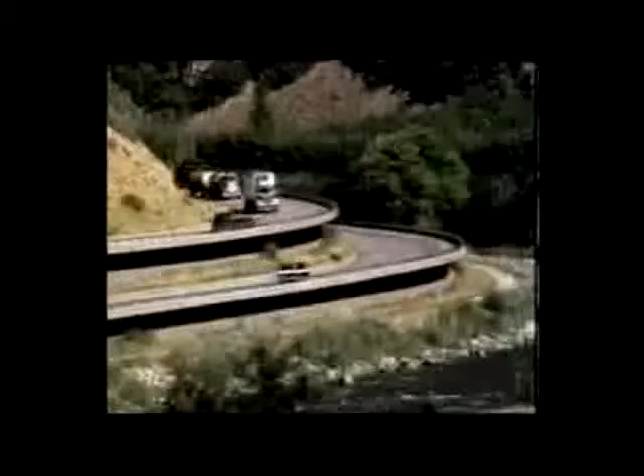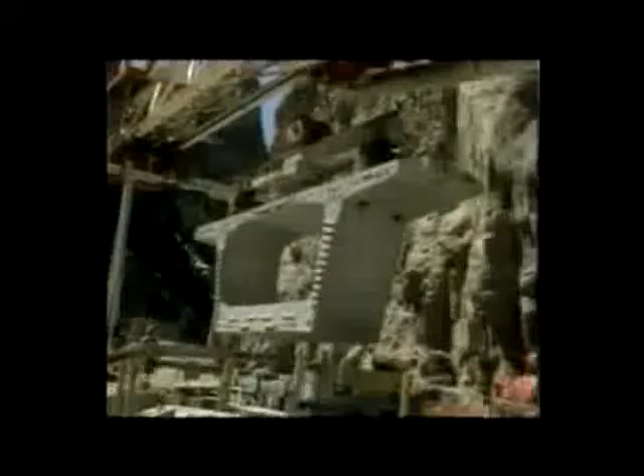Some of these technologies were developed on the Glenwood Canyon I-70 project, which I managed for 12 years. Under my leadership, we aggressively developed and implemented innovative solutions in many areas. Traditional methods and materials would not have allowed us to construct this award-winning project. Technology does not stand alone. It requires professionals for implementation, problem solving, and continual improvements. We call these specialists subject matter experts. Adoption of new technologies requires support from an enlightened management.

We will show you in this video how your agency can both save money and provide better service through internally supported MSE technologies. First, let's look at why agencies are not already implementing these MSE technologies. There must be reasons why we're leaving hundreds of millions of dollars on the table each year. There are reasons, and these include the human tendency to resist change, to preserve existing paradigms.

Technologies, however, are never static. From the beginning of history, man has pushed the limits of his ability. In transportation, we began on foot. And then we domesticated animals to carry us farther and faster. We continually improved the efficiency of horse-based transportation and reached the apex of that technology with the stagecoach. We drove the horse to its limits of power and speed.

Technologies reach conclusions. There are indeed limits on the envelope. Technologies continue to evolve. New methods and materials replace the old. The steam locomotive replaced the horse. However, the stage driver was not automatically a locomotive engineer. This analogy illustrates a paradigm shift. Accepted practice in transportation changed dramatically and forever with the introduction of the steam locomotive.

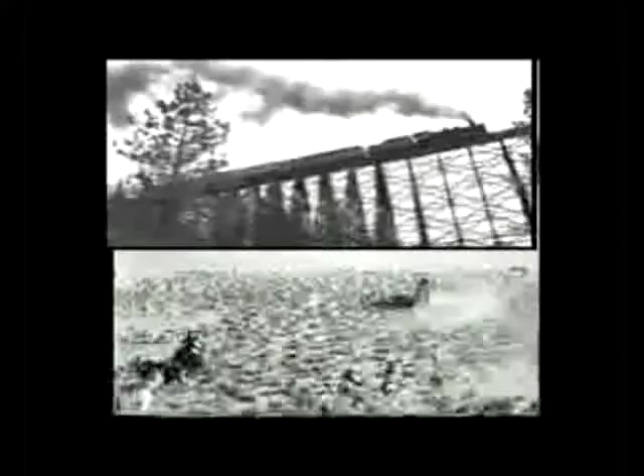A similar technological evolution is occurring in retaining features. These old workhorses are ready for the stable. Externally supported retaining wall systems are being replaced by internally supported earth-reinforced features. And just as in any major paradigm transition, technologists, subject matter experts, must evolve to advance the new paradigm. Our state DOTs are collectively losing hundreds of millions of dollars each year because they do not have subject matter experts in responsible charge of selection and design of MSE features.

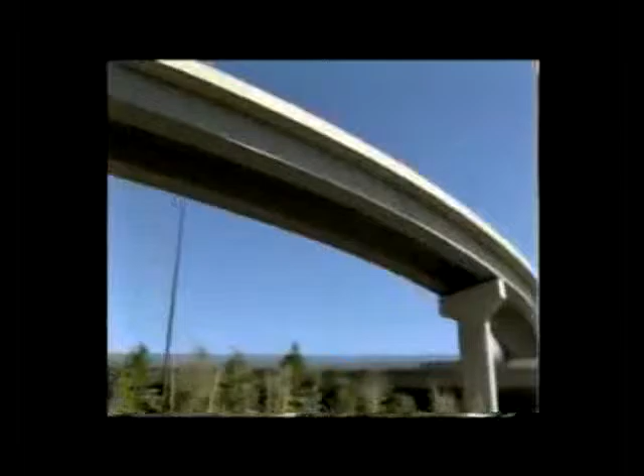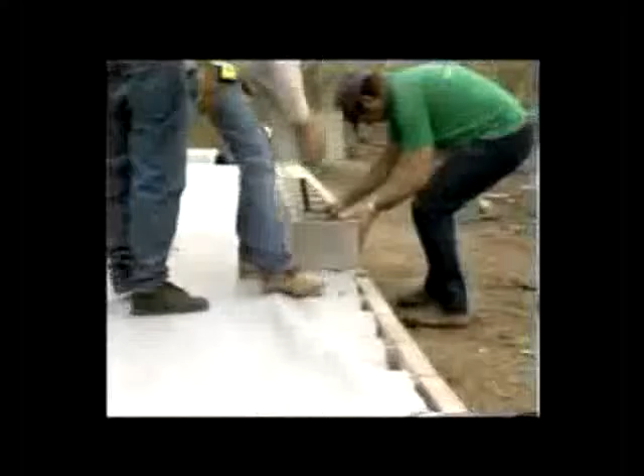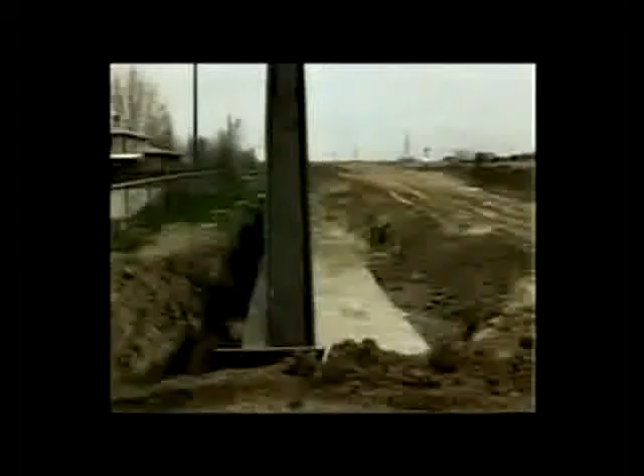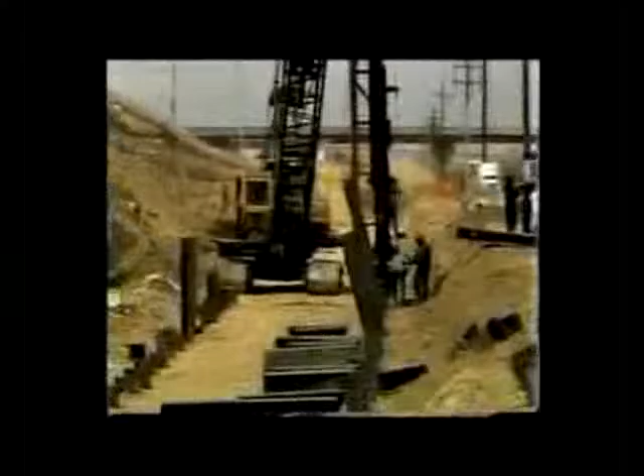State DOT engineers routinely design and supervise construction of these magnificent monuments. Yet few state DOTs can design or support construction of these basic retaining systems. Instead, state DOTs often rely on yesterday's technology or proprietary systems. Here is a cast-in-place wall on piling that cost over $70 per square face-foot to build. A CDOT generic MSE alternative designed in-house would have saved hundreds of thousands of dollars on this project.

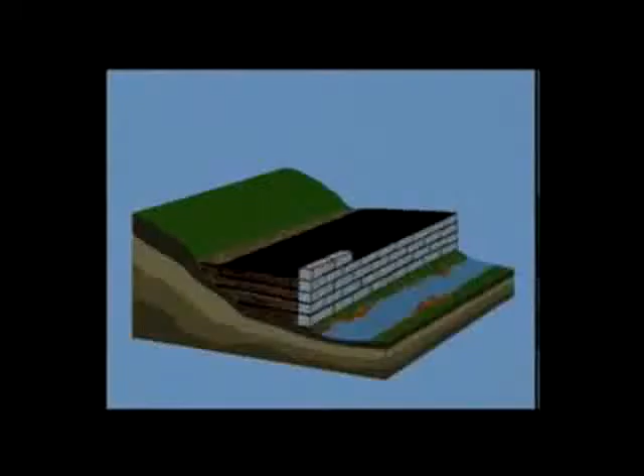These kinds of wastes of public funds become less tolerable as state DOTs realize just how simple the CTI MSB technologies are. There is nothing special, nothing difficult in design and construction of the basic CTI MSB system. Facing can be as basic as a concrete block. The typical backfill is road base. Reinforcements can be steel strips, wire mesh, polymer grids or sheets, any durable material. CTI generic MSB features are the future in wall and slope technologies. The sooner our state DOTs develop internal design and construction expertise, the sooner we begin saving money.

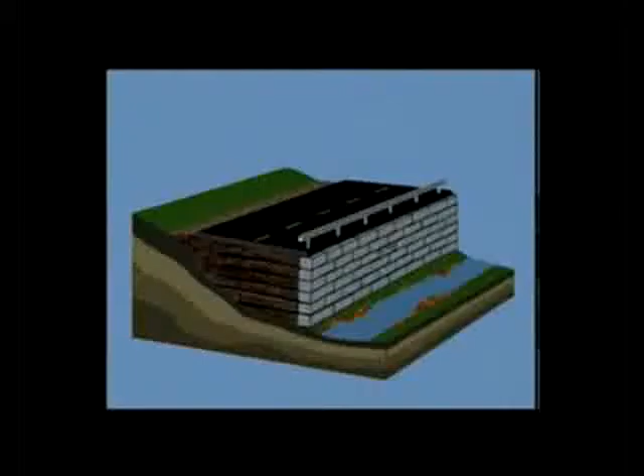CTI can teach MSB technology to transportation agencies and assist in developing subject matter experts. We have internationally recognized instructors and the finest course materials. The course is designed for engineers who have no formal training in advanced soil mechanics. What we ask of the student is a willingness to learn a new technology and a commitment to use it. CTI will assist you in building the bridge to savings.

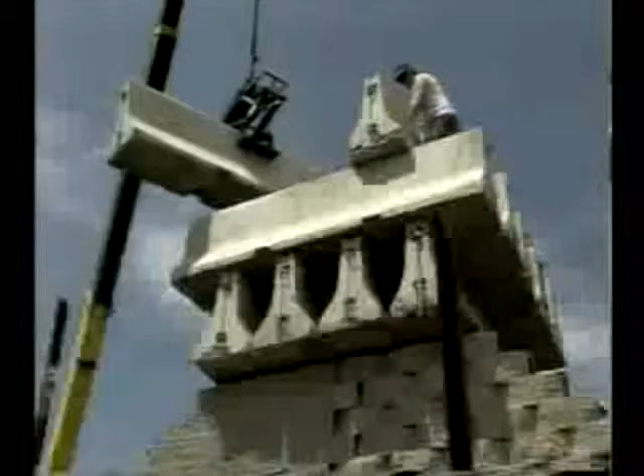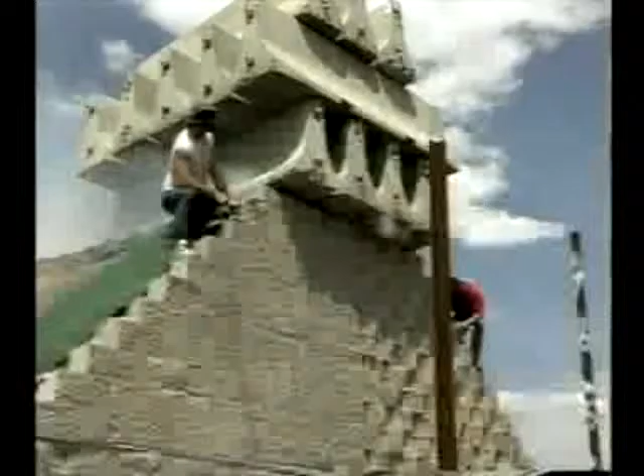This is a CTI MSB generic modular block test wall. We're using this wall to demonstrate the principle of internal stability. On this CTI MSB generic modular block wall, we used two types of facing blocks. We added a surcharge and we cut the connections between the blocks and the reinforcements. This is another demonstration wall. These blocks are made of recycled tires, and they're light, they float. We also cut the connections on this wall.

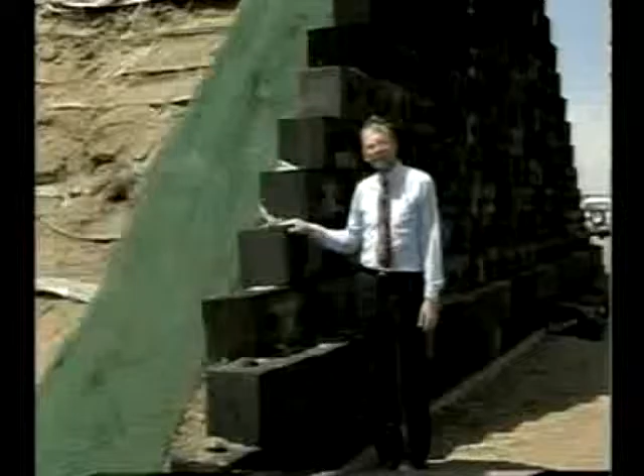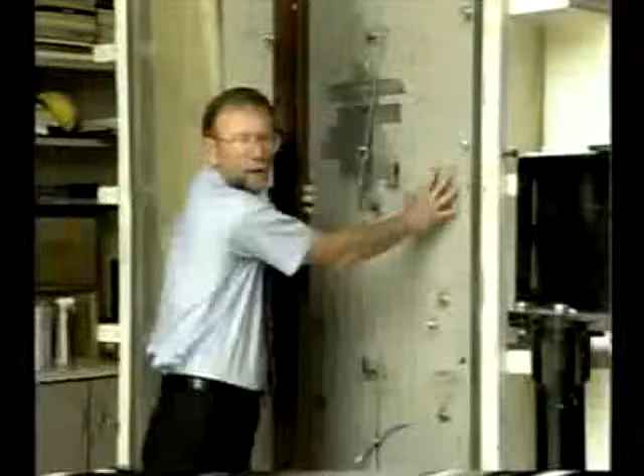This is our full-scale retaining wall test frame at the University of Colorado at Denver. Here we construct and test CTI MSB retaining walls. The current test includes a full-height concrete panel facade with shredded tires as backfill.

This is our full-scale landslide simulator. Inside, we construct landslides and test various remedies. The current test is a new concept we call the CTI Deep Patch. It consists of a negatively battered fabric wall and tire shred backfill.

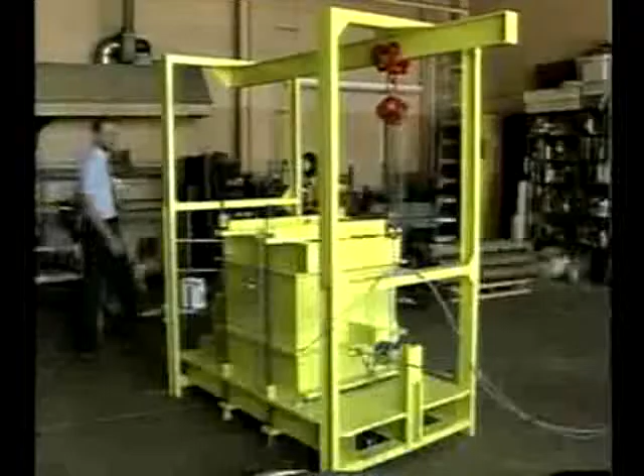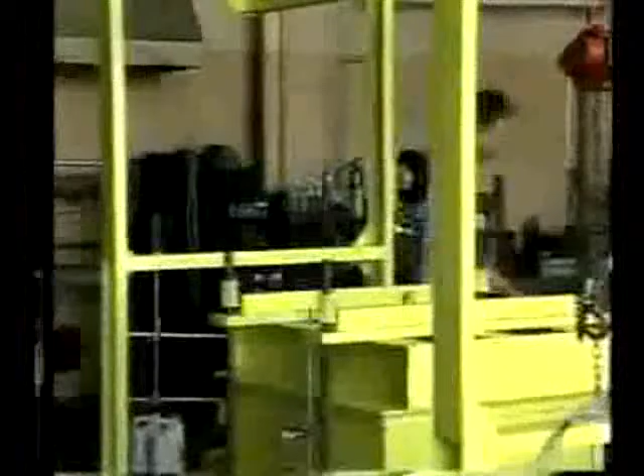This is our direct shear device. It has 30-inch boxes, which allows us to test a variety of backfills, including shredded tires and sawdust. We can also test the interface between reinforcements and backfills. This is a part of the CTI test frame where we test the connection strength between the modular blocks and the geosynthetic reinforcement.

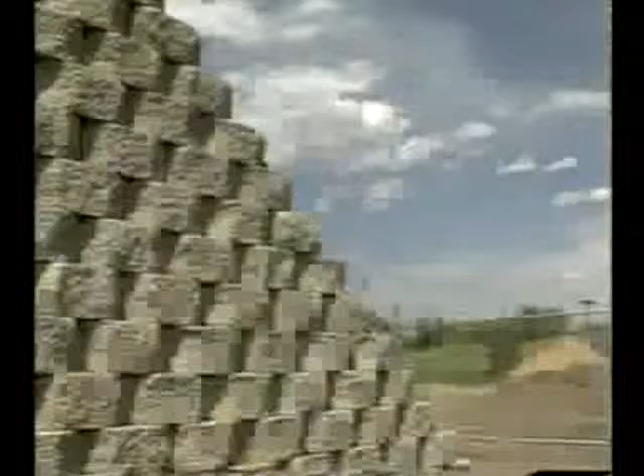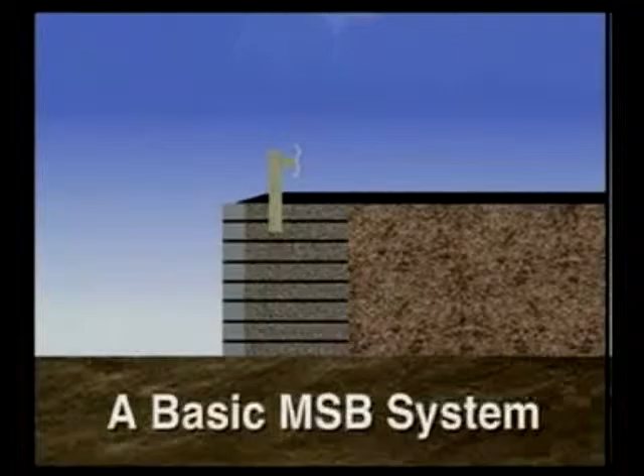What we have learned over the past several years is that CTI MSB technologies are the future in walls and steepened slopes. They represent the next generation in technology. CTI generic MSB systems are simple to design and easy to construct. Let's look at a basic system.

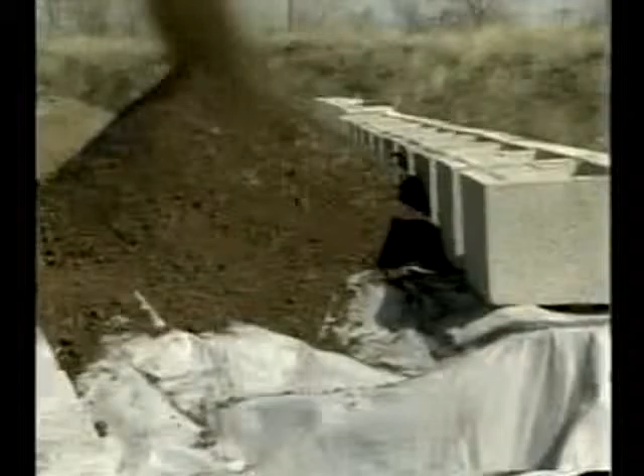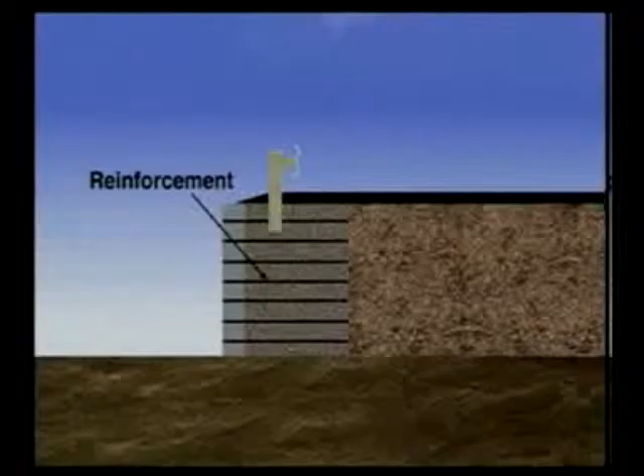Backfill is a granular soil. Road base is a good choice. Everyone knows how to build with road base. The easiest facing for construction is a dry cast modular block. Geosynthetics can be used for reinforcement. Placement is as easy as it looks. Geosynthetic strength, spacing, and dimensions can be determined from the CTI design charts.

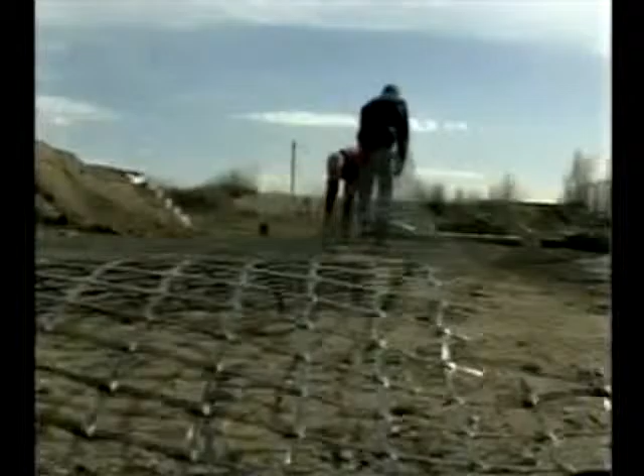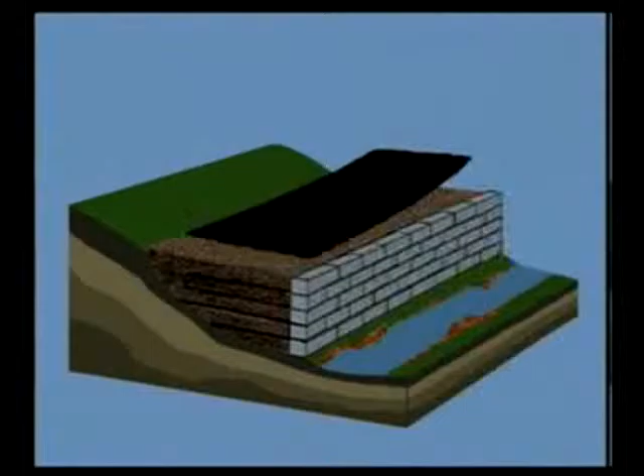Full-scale testing by CTI shows that this composite of backfill and reinforcement is 20 to more than 50 times stronger than the forces that drive internal failure. High-end geosynthetics have half-lives of several hundred years. Dry cast concrete blocks can be designed to last at least 75 years. And road base is certainly a durable construction material. Safety, longevity, and simplicity are the hallmarks of the basic CTI MSB generic modular block system.

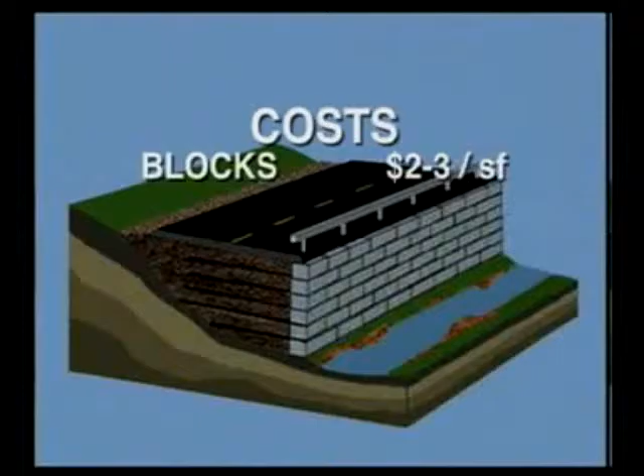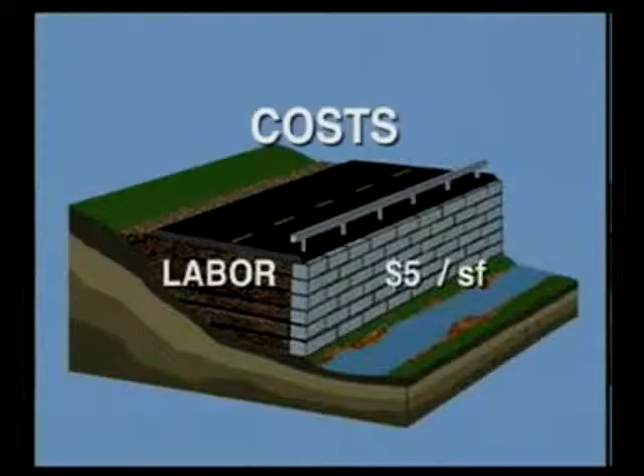Costs for this basic system are quite reasonable. Modular blocks cost $2 to $3 per square face foot. Reinforcements usually cost $2 to $3 per square face foot of wall. Granular backfill is about $2 per square face foot. Labor varies with location, but $5 per square face foot is a fair average for construction costs. At $11 to $13 per square face foot, the CTI MSE generic wall is one of the least expensive systems in the country.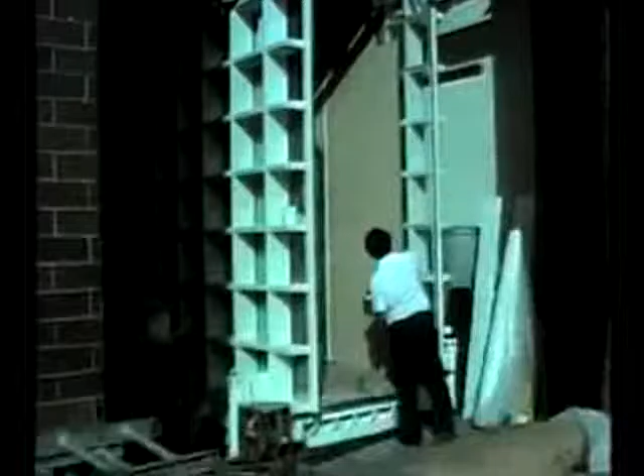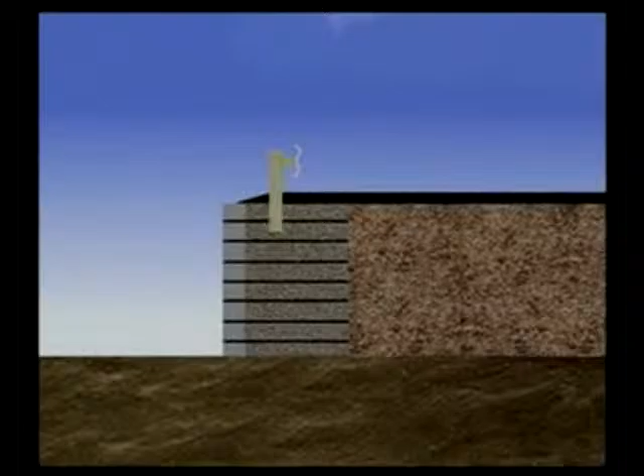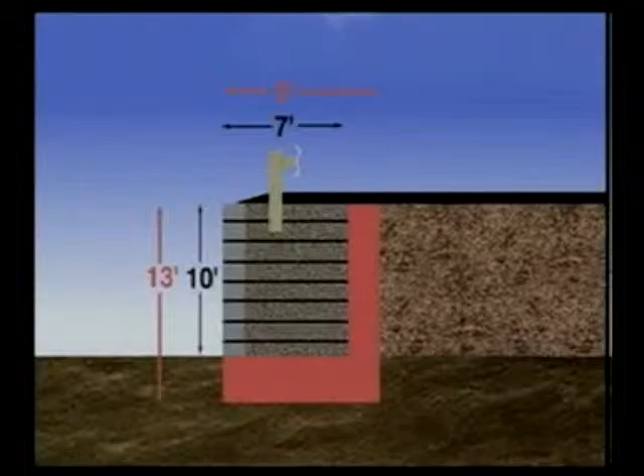The cutting edge of the sword of economy is honed with research findings from CTI and by in-house MSE experts at the beginning of project development. Let's look first at how research has improved the economy of the CTI MSE systems. One of the first discoveries was that internally stabilized features do not require embedment. They are quite content sitting on the ground. While some guidelines suggest embedment of internally stabilized features, this only increases size and cost. Even a 1-foot embedment adds 20% to the construction. 3 feet adds a whopping 42% to the construction.

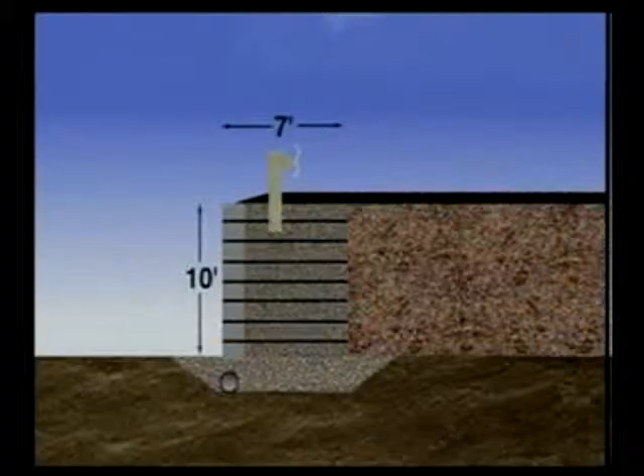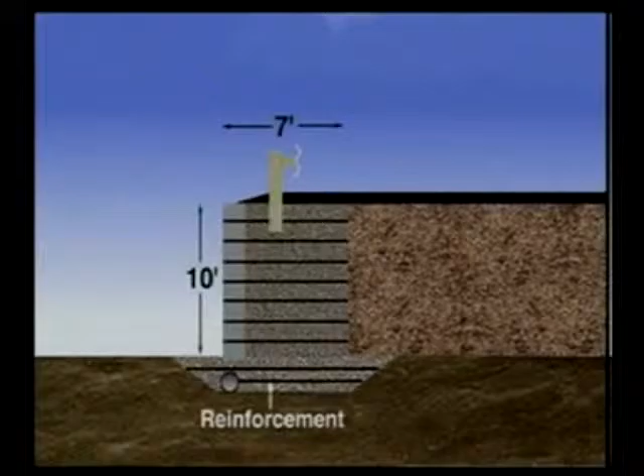Where foundation conditions will not allow the wall to be placed on the existing ground, simply excavate the unsuitable soils and replace the excavation with a compacted granular soil. Then build the CTI MSE feature on the improved platform. For the most severe foundation conditions, the designer may consider adding light reinforcements in the improved foundation. But for heaven's sake, don't waste money on a wider or taller wall than is required.

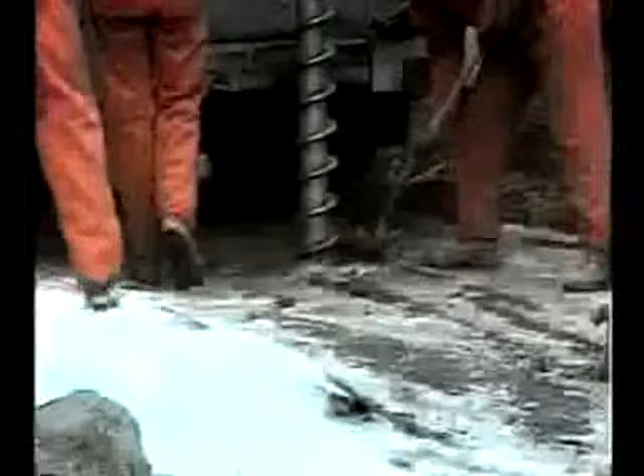The economies in applications with CTI MSE systems are maximized with in-house subject matter experts who participate from project inception. Transportation professionals can identify with the iterative process of finding the best fit for a new or improved facility. In this simplified example, the project manager can move the platform to any of several locations. If a cut is to be considered, the project manager uses geotech subject matter experts to determine subsurface conditions and to provide the most cost-effective design.

In the case of bedrock, steep cuts can be used. But if the hillside is subject to landsliding, disaster could occur. The project manager would not leave the responsibility for design of this all-cut cross-section to vendors and contractors after the project has been awarded. This is not always the case with an all-fill section.

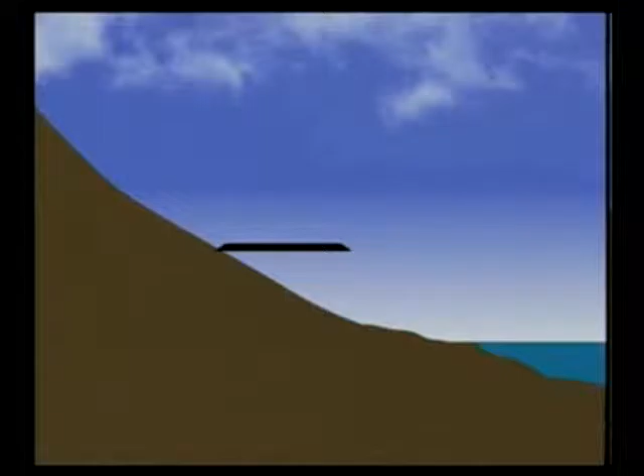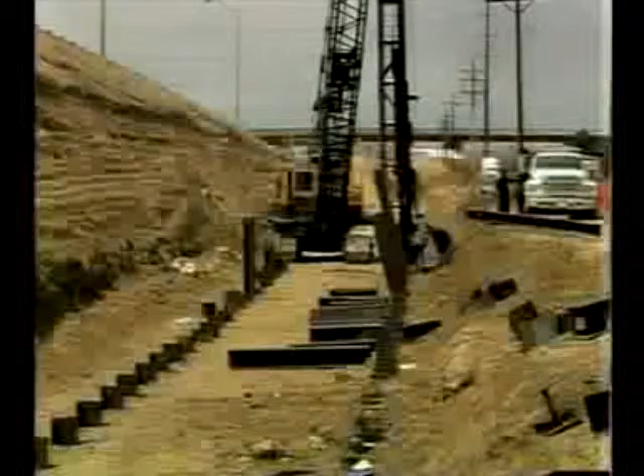Most state DOTs do not have MSE design expertise, and they are likely to follow one of 2 courses of action. In the first case, they will design what they know, which is usually a concrete cantilever wall. And if the subsurface conditions are unfavorable, the traditional designer will underpin the traditional wall. These constructions are fiendishly expensive, often 3 or 4 times the cost of MSE solutions. What can be missed without in-house expertise is the least expensive option, a steepened slope.

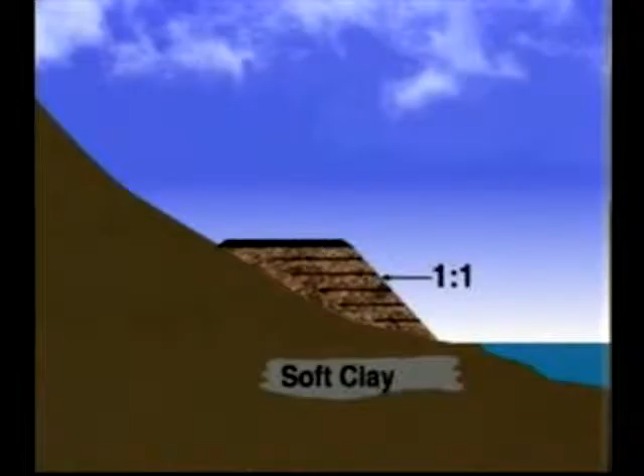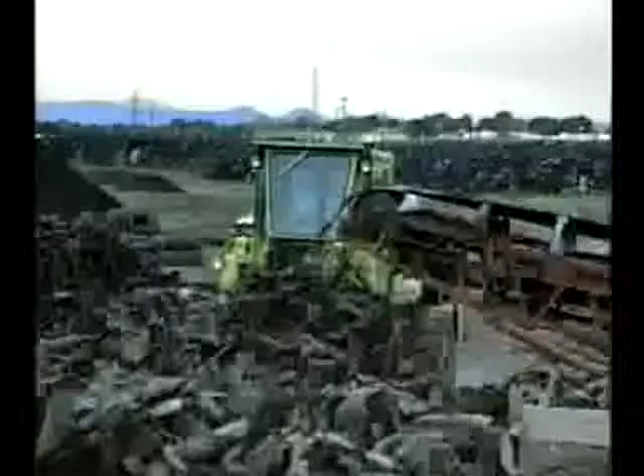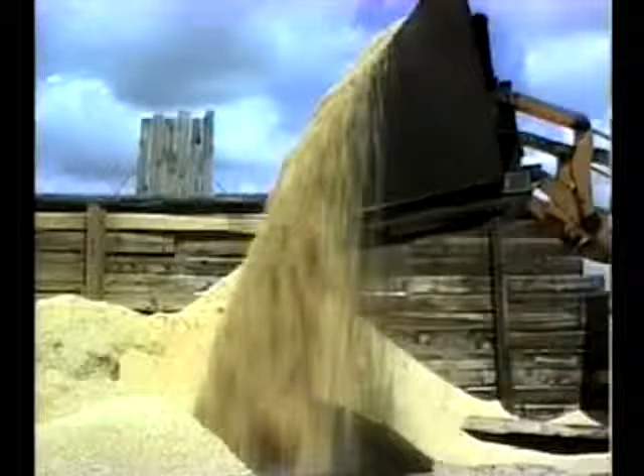And if the foundation is weak, then MSE designers can use durable, lightweight fills such as shredded tires. Shredded tires make a good backfill for walls and slopes. Sawdust can be used as backfill. Expanded polystyrene is an excellent construction material.

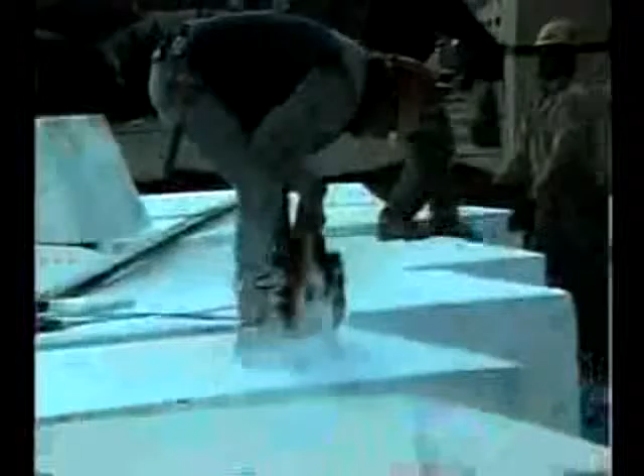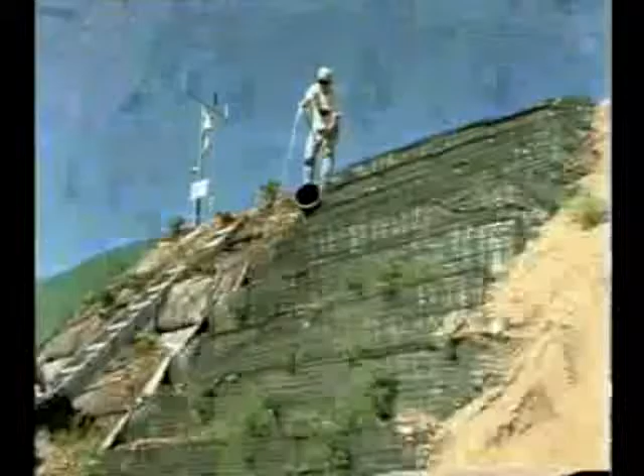These modern designs take advantage of the principle of internal stability. No facing is needed except to prevent erosion. Several systems are available to reinforce the backfill and prevent erosion. This steepened slope demonstration project is a joint venture of CTI and Tensar Earth Technologies.

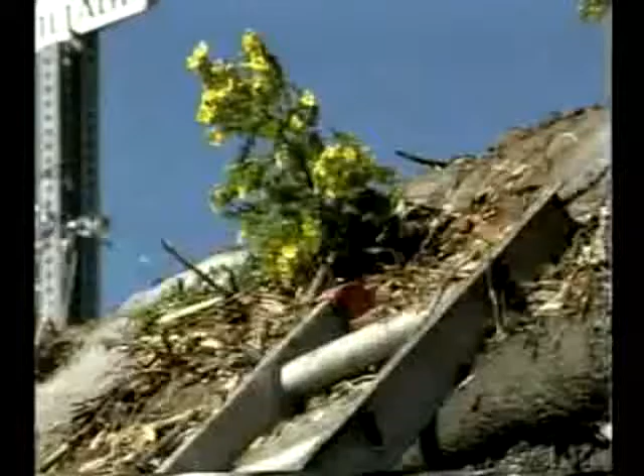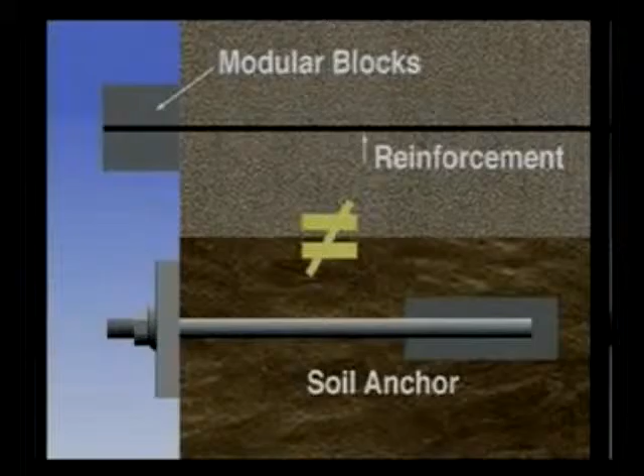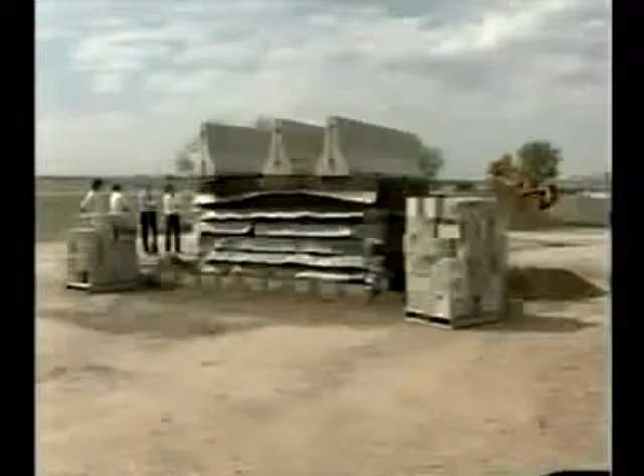The principle of internal stability can be illustrated by comparing a soil anchor with a segment of reinforced earth. If the nut of the soil anchor fails, the system fails, whereas the most important role of the facing block on the internally supported system is preventing erosion. Reinforced steepened slopes and walls differ only in the angle of the face. Once the angle of repose of the backfill material is exceeded, the reinforcements take most of the horizontal load.

The other choice a DOT may make is to simply draw a vertical line and leave the solution to contractors and vendors. This avoidance of responsibility denies the project manager the assistance of subject matter experts in wall selection during project development. An approved list is no substitute for internal expertise.

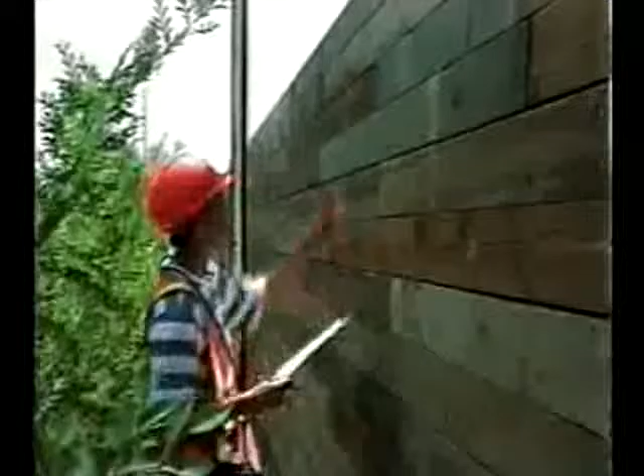Put the DOT people to work. Let them assume an ownership role and advance the MSE technologies. Our DOTs have capable engineers who would rather be self-reliant. Research pays off only when it is implemented. Let's look at applications of CTI MSE technologies.

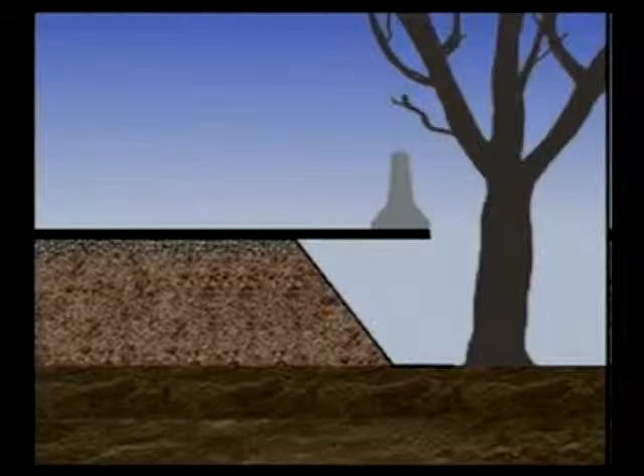CTI MSE subject matter experts provided a solution to this space constraint that a contractor probably could not. A highway widening was requested by a township, and they also wanted to save a grove of trees. A traditional, externally supported system would have damaged the trees. Any embedded system would have damaged the trees. A CTI MSE generic wall was the optimum solution. A truncated base was selected to minimize traffic disruption, and the wall did not require embedment.

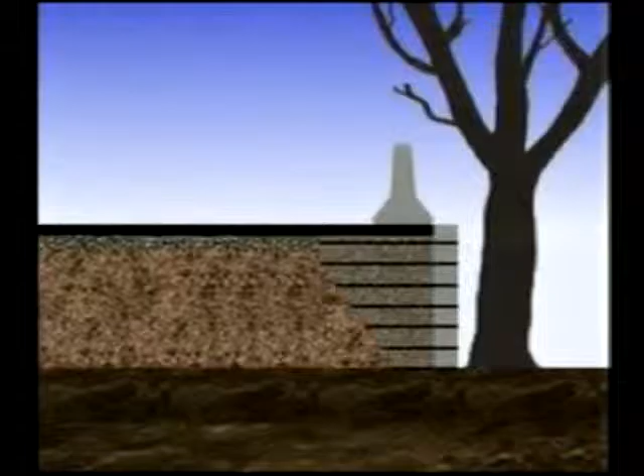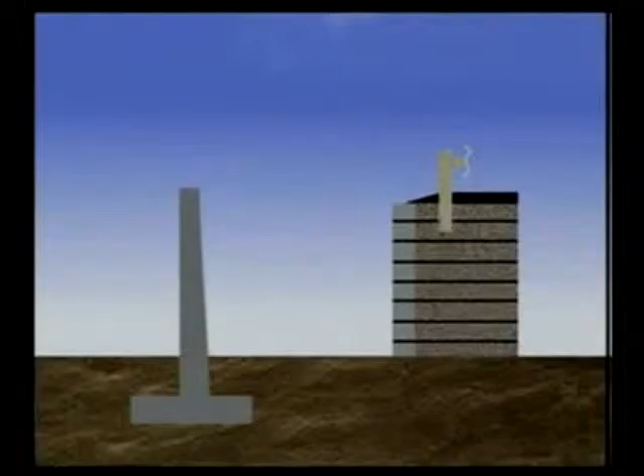A state DOT saved at least $1 million with non-embedded MSE walls over an industrial site that was known to have contaminated soils. Externally supported walls would have required excavation into those soils. Thousands of feet of these temporary walls were constructed. Milled asphalt was used as backfill. This one project will pay for the MSE generic design squad for years to come.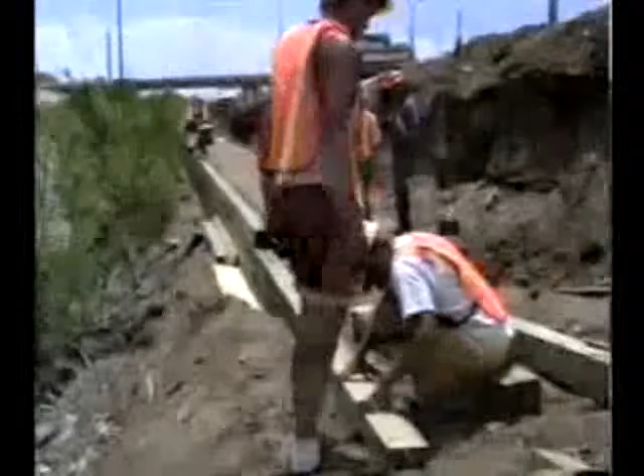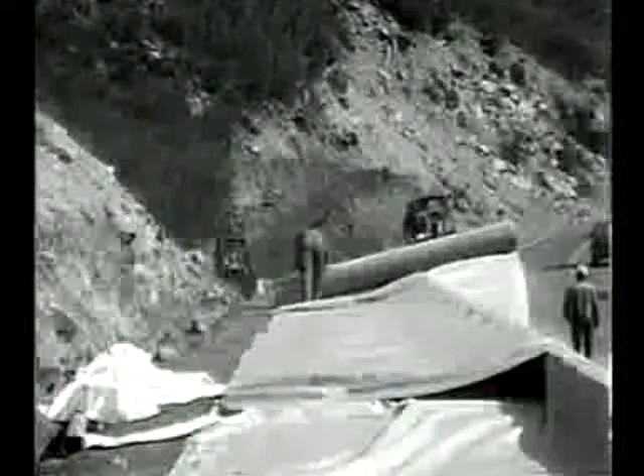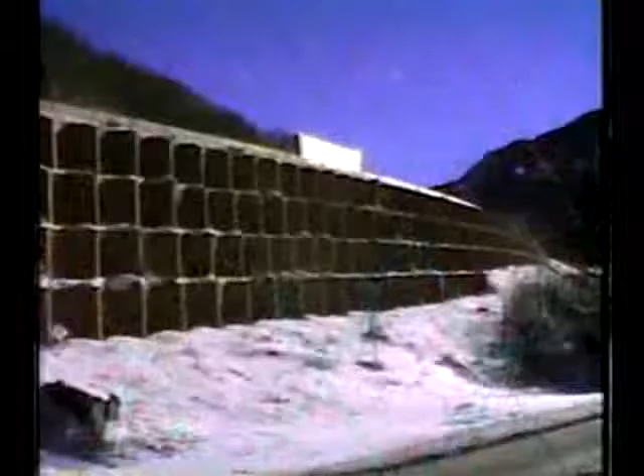Geosynthetically reinforced road bases and wall backfills have been used all over the world for many, many years. There are tens of thousands in service at this time, and there are hundreds under construction at this very moment. Mechanically stabilized backfills are the future in retaining walls and steepened slopes. MSB systems are versatile and can accommodate many facades.

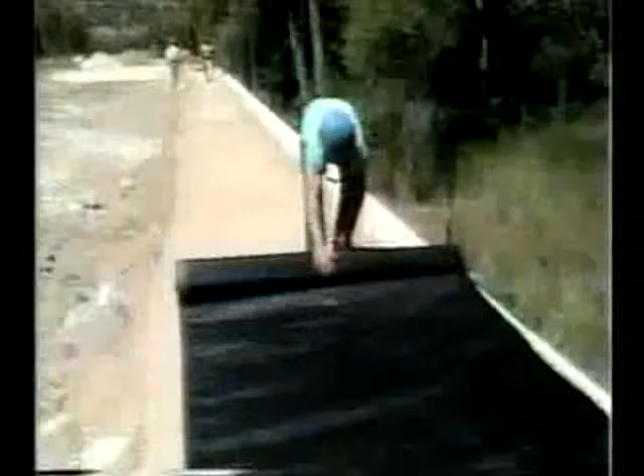CDOT has adopted internal responsibility for MSB design. We proved through a trial implementation program that millions of dollars can be saved each year in Colorado with this technology. The paradigm shift isn't easy and requires a commitment from the top down. MSB technologies are the future, and the Colorado Transportation Institute can provide a valuable service in moving up the ladder of technological advancement. CTI will assist your agency in developing MSB subject matter experts.

All of us in transportation are aware of the shrinking dollars. Our maintenance efforts just aren't going to be able to keep up with the deterioration of our infrastructure. We're losing the battle to preserve our roads and bridges, but we have to find new solutions. Raising taxes and doing business the same old way won't fly in today's political climate. Laying off maintenance workers is not a good solution. Canceling construction projects is not a good solution. Better science is a solution. We can do more with less through technology.

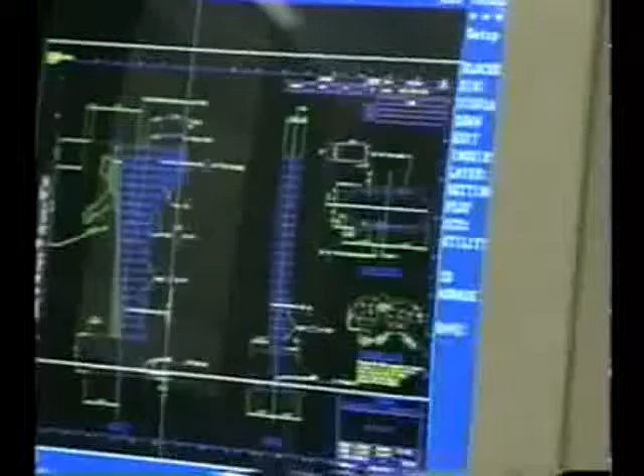All of us believe that research pays off, but just doing the research isn't enough. Here at the Colorado Transportation Institute, we stress it's the implementation of research that really starts to pay off. Research is an abstraction. Few of us in our DOTs actually perform research. Instead, what we do is implement research findings using the new and better technologies.

Of course, we can't blame today's accidents on yesterday's design choices, but we do know this. The decisions we make today, say to use the CTI generic retaining walls, can save money, and that money can be invested in the future, in finding ways to reduce accidents, in improving our pavement quality, in rebuilding old bridges. That's the value of savings. How do we communicate the value of savings to our design groups, to our construction forces, to our maintenance crews? It begins at the top.

Top management holds the key to doing our jobs more efficiently. We're the ones who set the direction and allocate the resources for this department. This is why here at CDOT, we encourage all our engineers to use new and better technologies. This is why we encourage them to use CTI generic walls. Top management can provide the bridge, the connection.

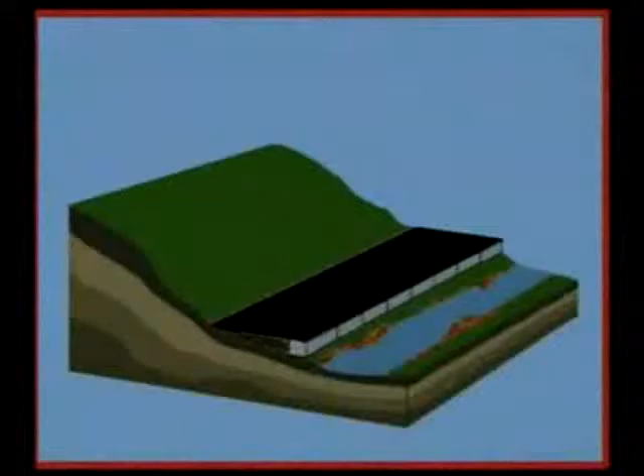CTI's generic MSB walls can save DOTs hundreds of millions of dollars a year. And we'll support your staff so you can indeed fully realize these savings. We'll help your staff become self-sufficient, design in-house, support construction crews in the field. But it's up to top management to facilitate this training, to facilitate change.